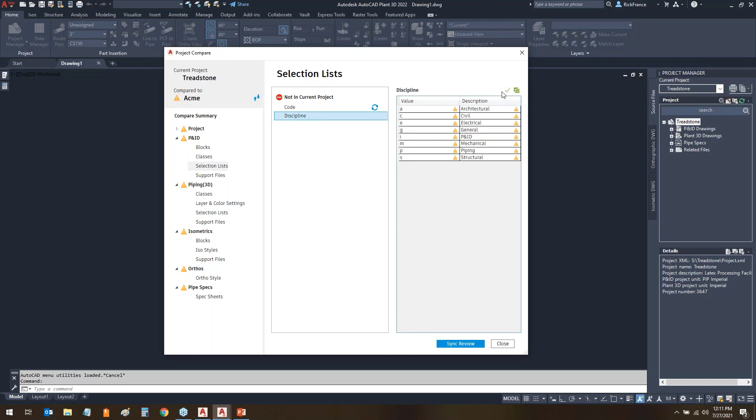The only thing I'd like to see even more so, here's the cone bottom tank and the manway. If you've taken my P&ID advanced class, you've probably seen those created. It's actually picking up anything, selection list, you name it, and saying we're ready to pull those over, including XML files. So I'm just going to go through here and start clicking it.

If I had one improvement I'd like to see them make here, under the piping you can see where the heat exchanger has some properties that have never been copied over. Just showing you a few things here and there.

I would like to see them add an accept all for everything without me having to go through here and actually review them, because right now that's the way it's set up - I have to go through and review each thing, each property, everything including the layer settings, and pull those over one at a time per item. I'd like to see them take it a little further and let me just say, I want to make these two projects the same, in one selection. Unfortunately, right now it's per file.

Now I'm going to stop here on these support files because these are actually XML files. What you can see over here is it's telling me compare is unavailable - I haven't selected one. If I select one of these, now compare is available because it allows me to compare the two files. The one thing is I have to have some type of software to compare two XML files. I've got mine here.

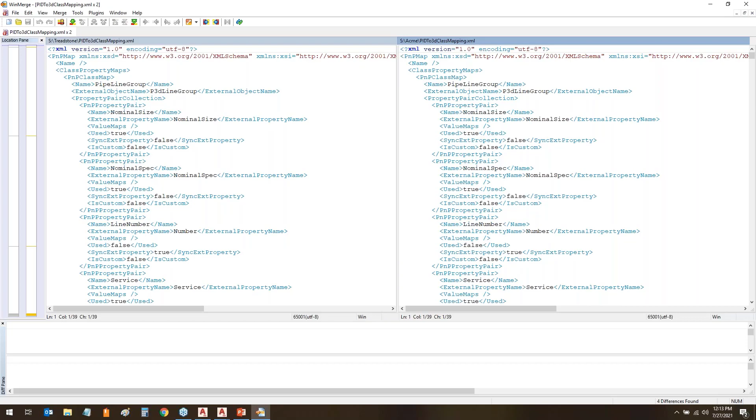But outside of Plant 3D, once you set up what you're going to use, you can see file 1 will be from Treadstone, file 2 will be from Acme, and it'll compare the files and let you see exactly what is different between those files if you want to.

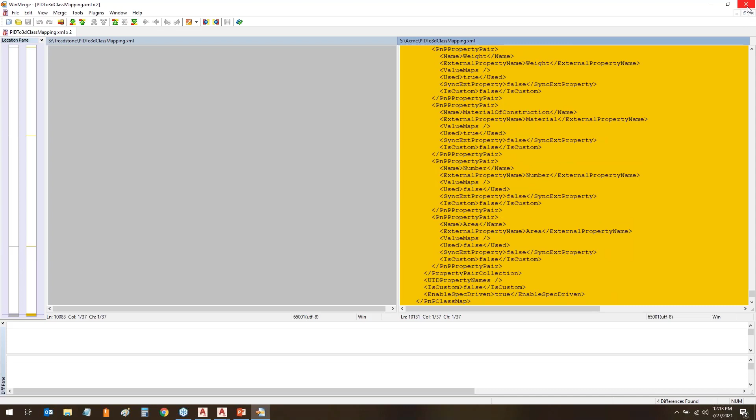So you can see Acme, which is on the right, has some different settings here under this property, and you can actually go through and review these if you need to see what exactly is different. Once you've done that, I'm going to go ahead and close WinMerge, and I can then accept those files if I want to copy them over.

Now we're going to come back to the XML files after I've finished going through these real quick. Notice here the isometrics, I can literally copy an entire isometric style.

So here my Vandelay B, which I created in a webinar several years ago, and for the isometrics, there it's found that, and I'm just going to tell it go ahead and copy it, and of course some XML files that go with it.

Once you've gone through these and accepted everything, here it picked up a spec where there's changes between the specs. So there's the CS150 spec, and Treadstone is the out-of-the-box spec, and the one here in Acme is the custom one that we've created in the advanced class.

So now notice the compare is unavailable on that, and it doesn't let me go to the settings on a spec because there's no software currently to compare those, but evidently they are thinking about adding that possibly in the future also. But I'm going to go ahead and accept it.

I've now accepted everything. It gives me a sync review where I can actually see the differences being accepted or compared over here. So I can hit sync review, and there's the project review where it's showing me everything that I've gone through and selected that is going to be copied from one to the other.

Because if you remember, prior to 2022, if you didn't copy the settings from one project to another when you created it, that was it. That was your one chance to do this.

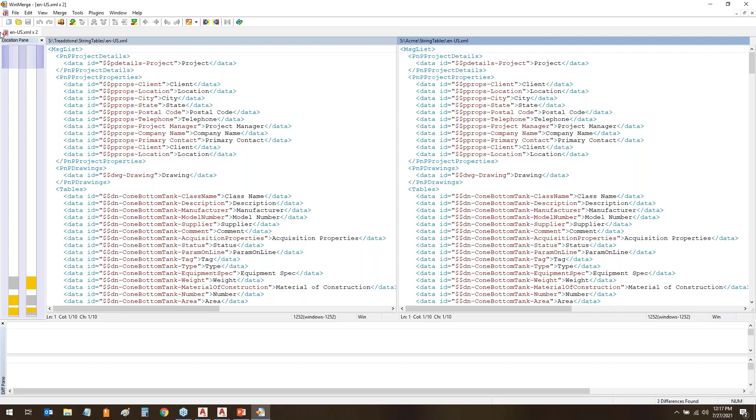I'm just going to kind of look at those two. Over here on the right-hand side in Acme, you can see where it's found some differences with the heat exchanger, for instance, tube temperature, and then on the left-hand side, you can see those are actually already in Treadstone.

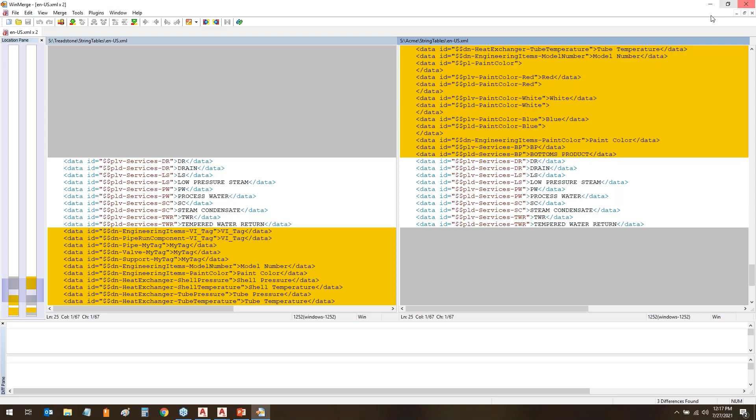That's because some of the settings I copied caused it to rewrite the XML files, so they're not identical. In reality, they are identical, they're just not in the same sequence. So that's what happened there. If you're looking for perfection, sometimes that may happen.

I mean, I could come in here now and say, let's copy that XML file, sync it, and sync now. If I did it now, those two files are identical at this point. So now they are going to be... I did project setup instead of project compare, I apologize for that. Let me hit cancel and go back to project compare.

This time when I do it, they are identical because the XML file was copied after it. So the only way to avoid finding something wrong with an XML file would be to do everything and then do the XML files, or just don't worry about it, which is what I'd suggest. They were identical files, just in a different sequence, so it saw them differently.

The other thing that doesn't get copied are paths and templates. So let me come over here - I've got 2021 open to Acme. I'll place it on the left-hand side, and we'll do Treadstone on the right. If I compare the project setup of the two projects... just take a second for it to open. Here's the project setup: 2021 for Acme on the left, 2022 for Treadstone on the right.

If you look at the paths, you'll see the support path and the templates are different. The template here is different, and some of the support - well, that one's the same. Of course the Treadstone is different, but like the equipment template here, that one didn't change. And here again, this template right here didn't get copied over. So it's not copying paths or templates.

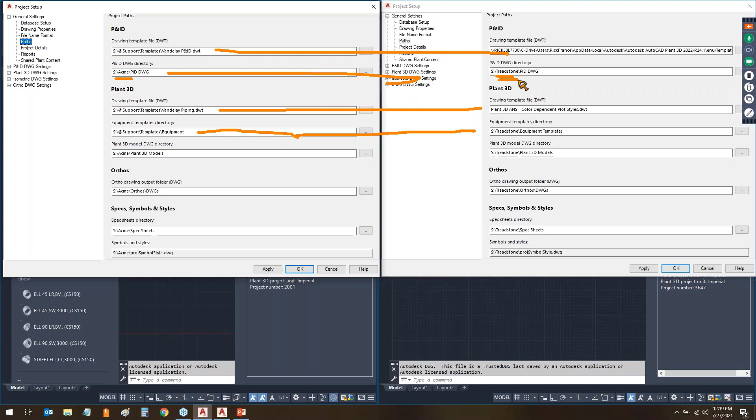They weren't even in the list. Kind of makes sense because they can be project dependent, and as you can see, all these paths are going to be project dependent. So it makes sense that it's not copying those over, but it's just something you need to be aware of - because, again, the Ortho template title block, if I come over here to the title block of the Ortho template, it did not set the template itself to match because that was not part of what it's going to sync.

So paths and templates do not get synced. As with all rules, there's always an exception. That's not true with the isometrics, because they're set by the actual project's isometric style. So if I compare the isometric templates, those did get copied over because they got copied with the isometric style itself. That was the exception to the rule, because it copied the entire style over, so those templates got changed. But Ortho templates, P&ID, and plant model templates do not get synced. So just be aware of that. Everything else is good to go.

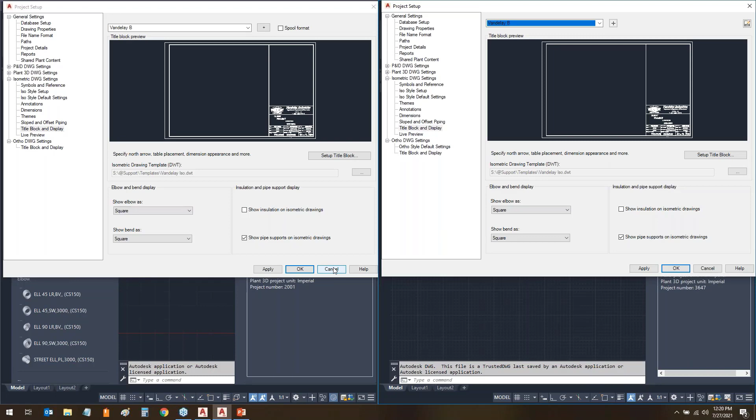I'm going to cancel my project setup here and maximize back up. Outside of that though, it is a very slick, nice way to not have to worry if you missed something in the beginning on one of two projects. Those of you using template projects can now create something in your template project, copy it to others, and sync it up with other projects after the fact - or vice versa. Create something new, like a P&ID symbol, in your current project and then sync that up with your template project so it gets that change. It's going to make life so much easier for so many of us, now that we can sync and copy these settings from one project to another after the fact. I'm very excited - if you can't tell I'm excited about this one, I apologize, because that one to me was a great add-on.

The next one is the offset location. Let me give you a little scenario of how it comes into play. You're now looking at another drawing on my screen, and in my project, 0,0 happens to be the intersection of column A1. That's where I've created 0,0. If you've used Plant 3D, you're familiar with the fact that all XREFs and everything have to line up on 0,0,0 - no exceptions. That has made it difficult for some people who want to put it into a real world environment, so they've had to come up with workarounds for that.

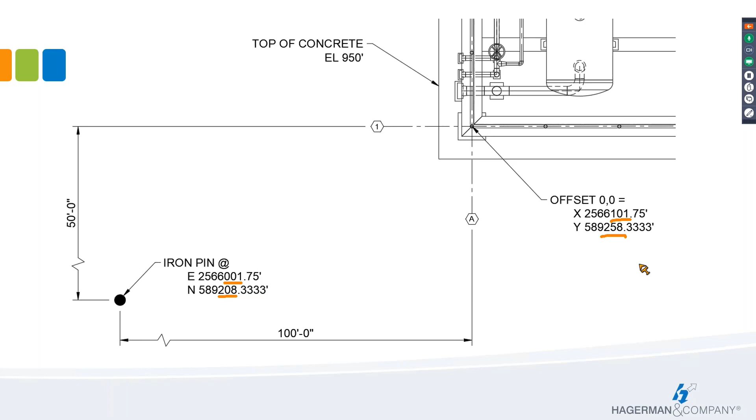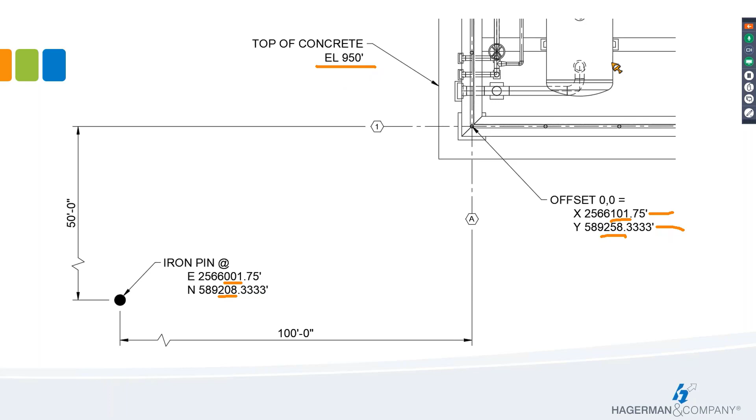So basically, if I take that and add 100 feet to my X dimension, and add 50 feet to my Y dimension, offset it that way, that's going to give me a relationship to that iron pin. So I need my offset location to be X and Y, that additional 100 feet and 50 feet in Y dimension. And I want the top of my concrete to be 950 feet above sea level. So those are the dimensions I'm going to use to get everything onto my project.

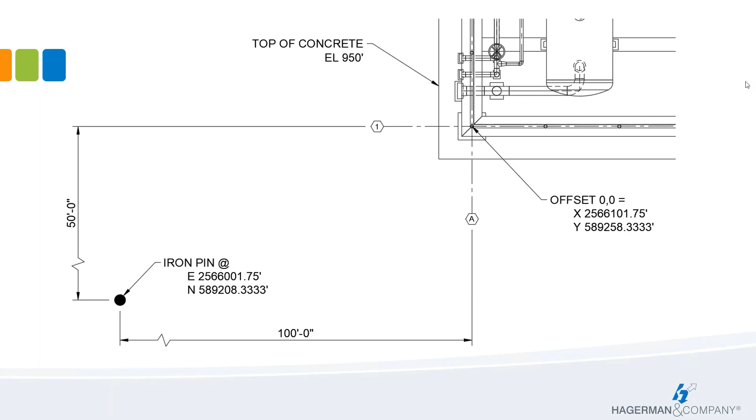So back in AutoCAD Plant 3D 2022, I'm going to go first to the project setup. One of the differences you'll notice on the orthographics page is, if you remember, before on the title block display page we also had settings for center, how you want your center lines and hidden lines. They have now been pulled into a separate page called Ortho Style Default Settings.

So here's that same information we used to see below the title block and display of the ortho settings before. It's now been pulled separately, and they have added this offset location. So for instance, if I wanted to put it in, remember I told you what my X and Y were, I'm just going to type it in here.

I could have picked something that wasn't as much typing, but I went ahead and did it anyway to be kind of realistic about where this plant was actually going to be, which in real life is going to be 950 feet above sea level. I'll go ahead and say apply, and you can see it's now got the offset location for the X, the Y, and the Z recorded into my default settings.

Now, let's say in real life it's rotated 9 degrees or something like that. You could also do that to get the exact rotation. I like mine to stay at the 0 plane, so I'm not going to do that in this particular one.

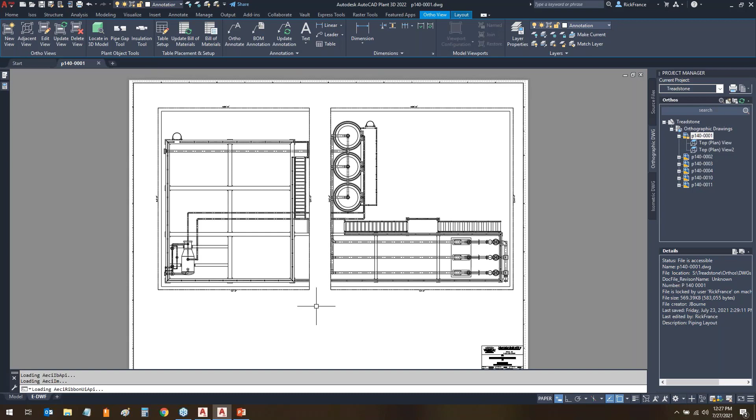So I'm going to come over to my orthographic drawings. I've already got one created here. Now I have split this one up with match lines into two drawings. Normally in real life, if I was doing something like that, I would have them on two separate drawings—that's the whole purpose of the match lines. If you watch the webinar on the OrthoCube and orthographic views, that's what we're talking about here.

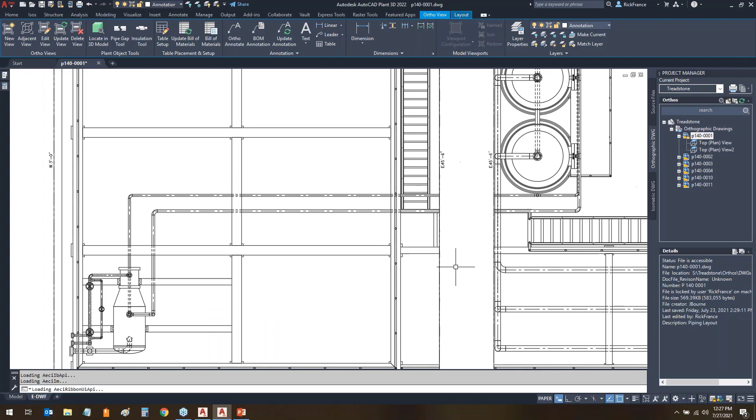Again, being that this was 0, 0, 0, the intersection there of A1, this one's south of that, west by 3 feet. You can see here where I took my match lines—if they were on two different drawings, they would be lined up by the 45-foot and 6-inch mark. So it gives me a way of showing that information. I put it on here to show you what it was beforehand, and now I'm going to delete those views and recreate them.

Three new views. This time when I open it up, because I have set an offset location in the project itself, you can see those dimensions are in here at this point, exactly as I put them into the project properties, and I could actually change them here if I wanted to.

So let's talk about this from a top view. Let's say this was going to be on the actual civil drawing, and it's going to be rotated 10 degrees. I can manually put in 10 degrees, and you can see it rotated my entire plant those 10 degrees, or whatever else. Let's say it was going to be negative 9.5. Whatever I put in there, it's going to rotate accordingly, so I can do something a little more realistic on that civil drawing.

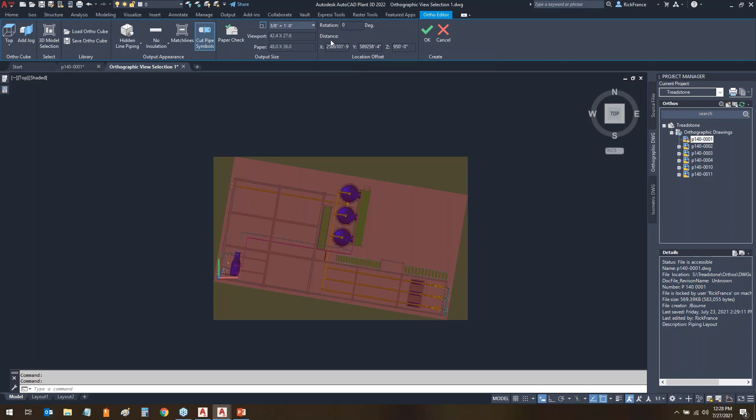In my case, I'm going to leave it at 0 because that's the way I prefer to work in my actual construction documents that I'm creating here, but it is going to be basing some dimensions and things like that on the actual location where it is in reality.

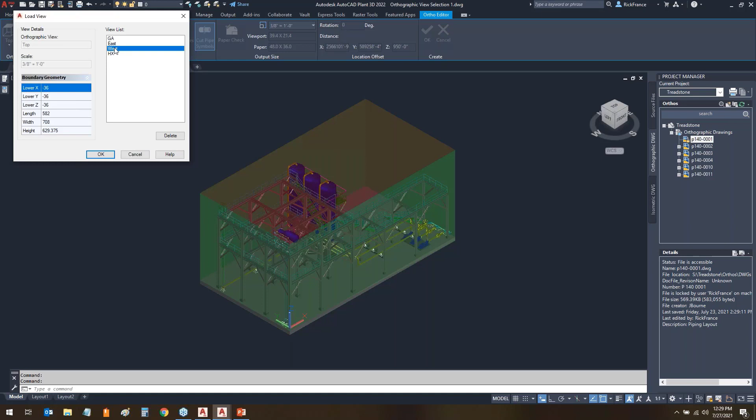Now I'm going to load the ortho cube for my west side, which is basically just like in that other video, that other webinar, the Ortho Cube and Orthographic Views, same thing I did there. But this time when I add it, let's make sure the match lines are turned on. We'll add it in here, and I'll place that one over here.

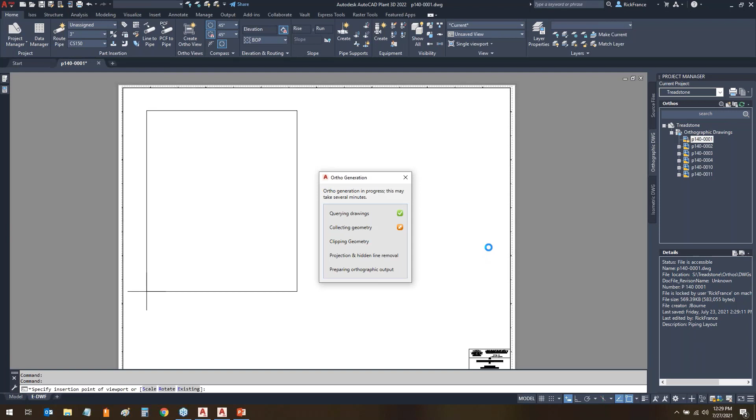I'm going to turn around. You'll be able to see, without me zooming in, that those views have a different dimension than just 3 feet in there, but we'll look at those after we place the other one in here.

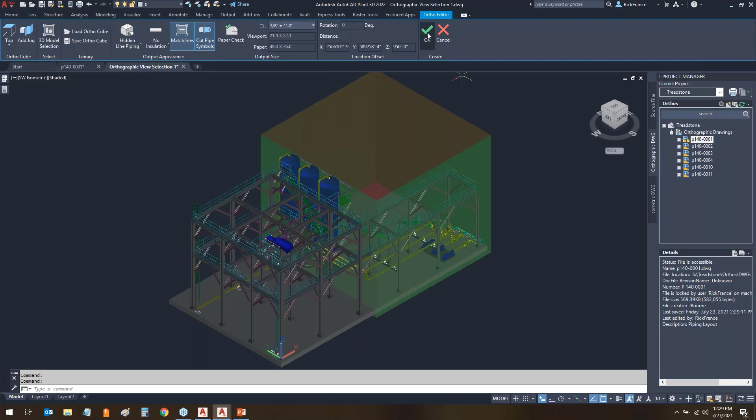We're going to go ahead and grab the east view. So I'll load that ortho cube in here that was predefined in the other video. We'll hit OK, and I'm just going to place it right here beside it. And that way we can see the results of that offset location.

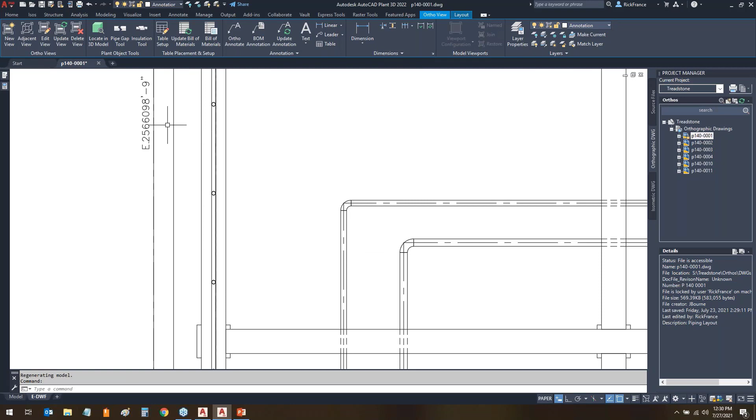So if I zoom in here, you can see the east is set 3 feet below that offset location. This one's now 3 feet in that direction. And of course, these are also using my east and north.

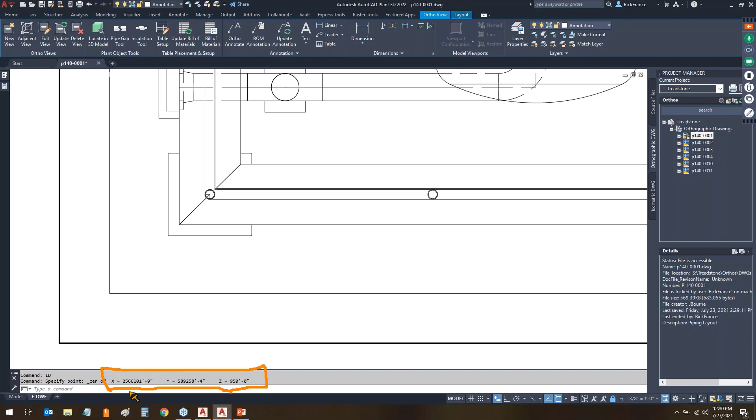It is physically placing my ortho view at, if I did an ID of the center of that railing, because that would be on my X-axis 1, you can see it's actually placing this ortho at that XYZ that was predefined in the project. So that's how it's actually working, is it's using the dimension I gave it to place my orthographic drawings, and that's how it's using those dimensions.

So that's just to show you basically how it affected the plan view. Let's go take a look at an elevation real quick.

Same thing in here. You can see originally the elevation at top of concrete is at 0. Here's my elevation at 25 feet for level 1. Level 2 is at 40 feet. Even bottom of pipe here is at elevation 10 feet. So just showing you what it was originally.

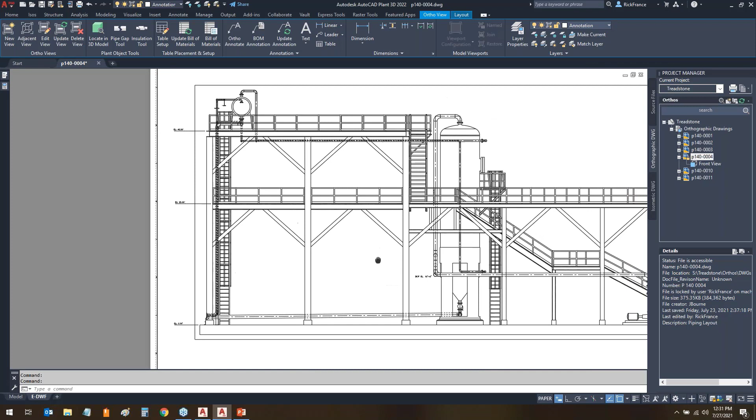I'm going to go ahead and delete the view. Since these are actual dimensions, I'll have to delete those separately, and we'll create a new front view based on the offset locations that we've set in our project. So again, I'm going to load in that general arrangement top view, but change it to a front view, and we'll just place it.

I'm going to turn off the match lines. We'll just place it right here on my elevation drawing. Same exact view as far as what it looks like. It's identical to the one that was here before.

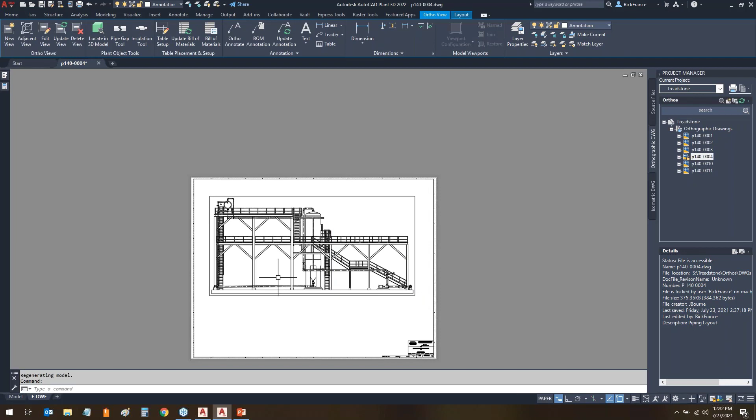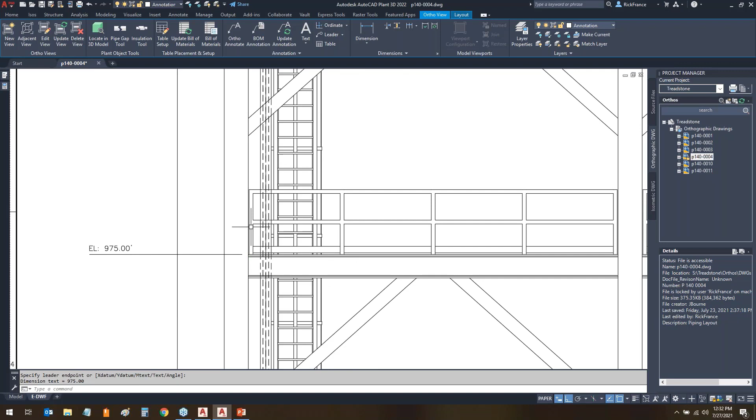The only difference is if I came over here and added my ordinate dimensioning, which I have set up for the top of concrete, elevation 950 feet, because it's giving me the sea level now. Come over here on this one, it's going to be 25 feet above that, so 975 feet. This one will be an ordinate dimension of 990 feet.

So I'm actually getting those sea level dimensions when I look at this plant now, just like I would in any plant I would design in real life.

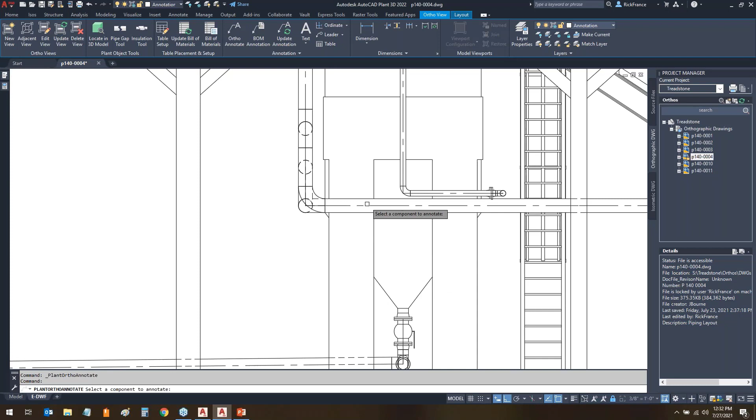And it's not just with the ordinate dimensions. If I came over here and took the bottom of pipe with the ortho annotate of this particular piece of pipe here and took a look at the BOP, you can see it's placing it in there. Bottom of pipe elevation 960 feet. So again, it's giving me that, where it is above sea level.

If I don't want to show sea level, then I just need to change the view to a 0Z axis, and it would give me everything just like before.

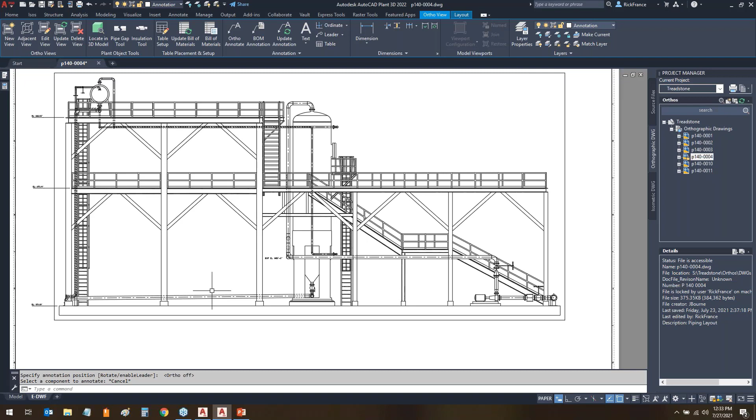So it's all on how you work in your company, but you're able to get these offsets now to where you can get the dimensions exactly like you need them, if you work with something like that, with the sea level or any other type of Z axis you may want to define, or X and Y. It's all relative to what you set up in the project.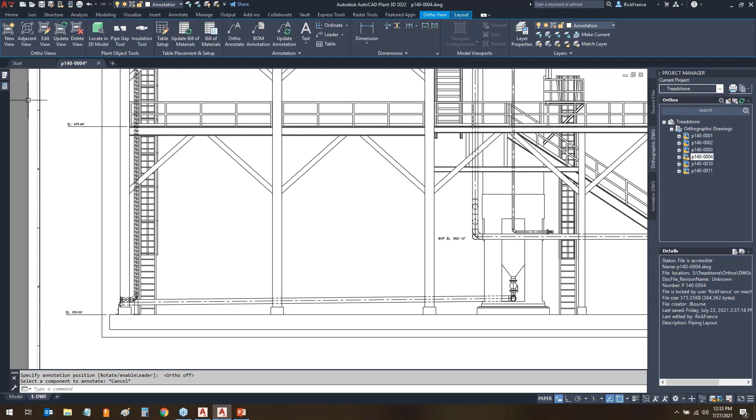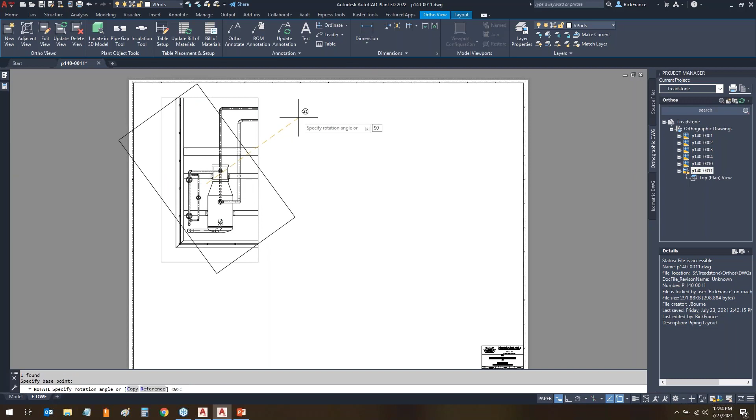Now let's take a look at the rotation. I'll go ahead and use this drawing here. If you watched that webinar on the ortho cube and orthographic views, one of the things we addressed was that if you want to show this at a rotated view, most of the time they will tell you to rotate the viewports in here, and work with it that way.

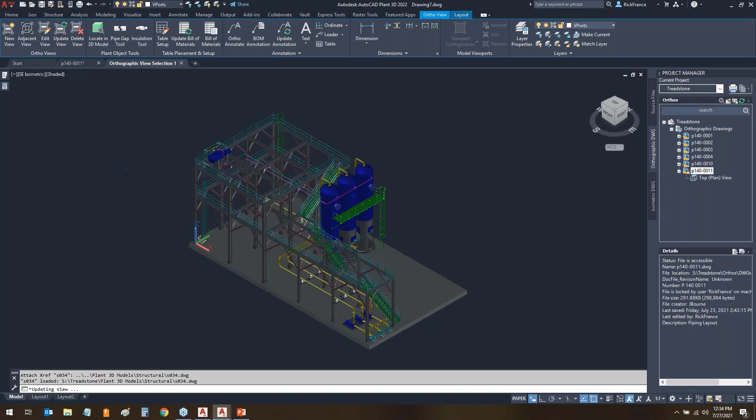The problem is this is not the front view, so if you do an adjacent view of the front, it's going to give you this view. I won't go through that again, it was all addressed there. But the main thing is if you ever edit the view, it's going to put it right back as it was originally. So it just flips it back around. It's no longer rotated, so it's not the best way to do it.

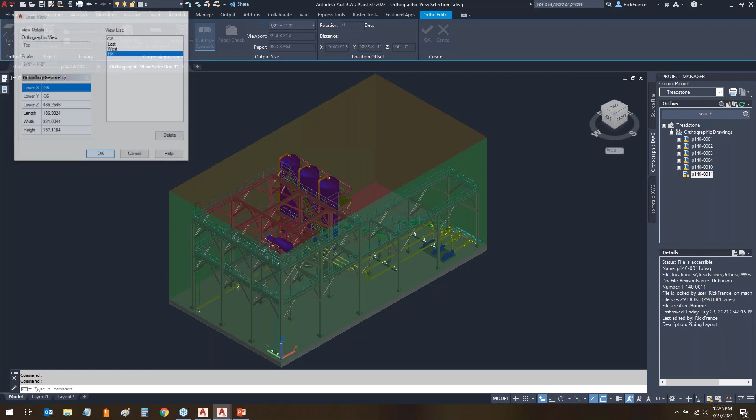In that particular webinar, I showed you the best thing to do, the way the software was designed in previous releases, was to rotate the actual ortho cube in this view. So you would come in here, I'll load the ortho cube in for that particular one, and then rotate the ortho cube, and that would solve the issue.

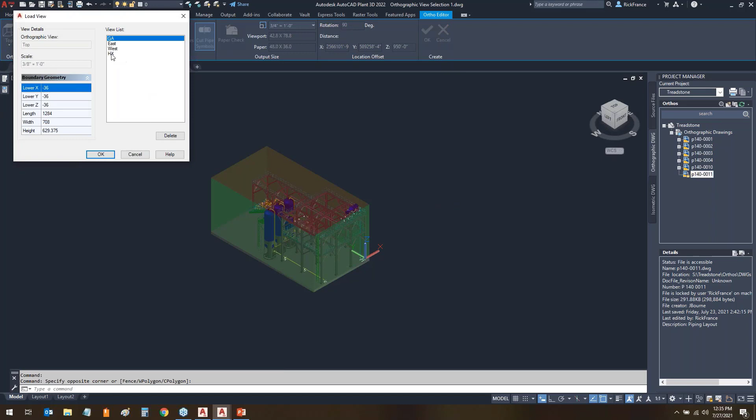That's not necessary anymore. It's actually easier than before because now I can literally just put in a rotation up here. And you can see it rotated the entire cube project. If I went and loaded that exact same ortho cube I had before, it's going to be out of place now because of the rotation.

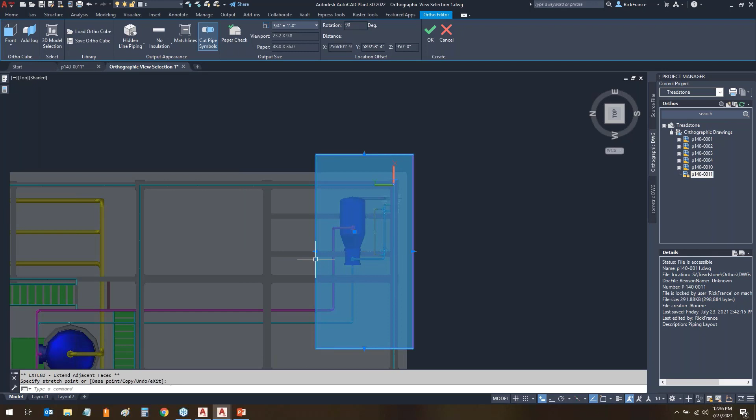But if you notice here, when I look at the front, that front view is the one I wanted. So I can just come in here at this point. I'm going to resize this thing, let me turn off some osnaps so it won't snap to anything, and just resize it. That looks pretty good right there. That's basically what I had, maybe a little larger, but basically the same shape as before.

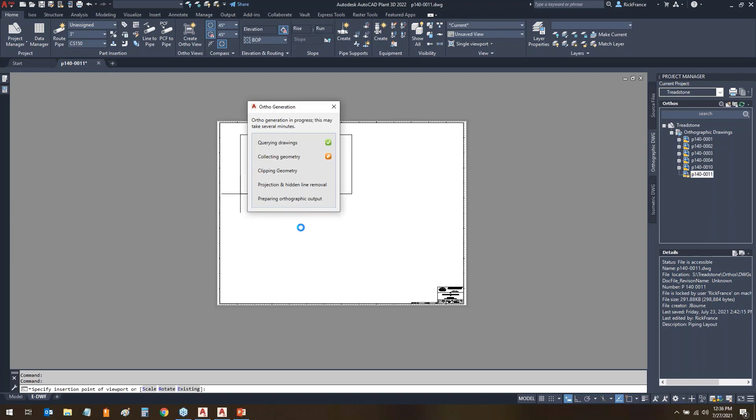I'm going to go back to a top view, and go back here. So now I'm looking at the top view, but it did the rotation for me. Instead of having to go through and rotate that ortho cube like before in previous releases, here I can just give it a rotation right there. Everything rotates. And if I was at 10 degrees of the whole plant, I would just rotate the whole plant another 90 degrees.

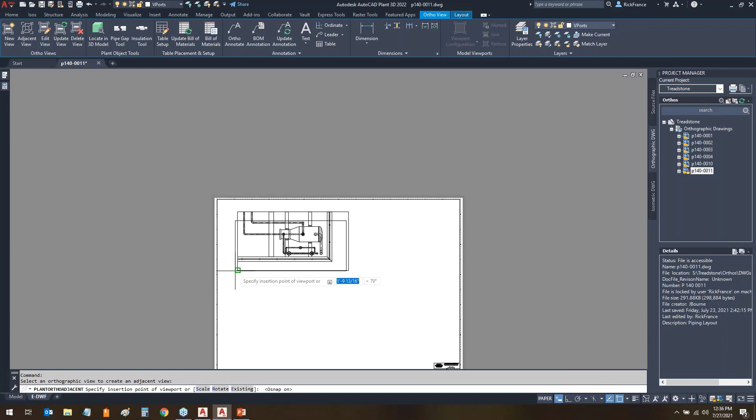So it'd be 100 degrees and get the same effect. But now, just like before, if I did an adjacent view, it sees the front view correctly based on that rotation, so I can line things up and get the same thing. Just like in that previous release where I showed you the workaround, now I can simply go in there and say rotate it 90 degrees and I'm done. I don't have to do anything else, and it will remember it in this drawing from that point forward. So they've made it a simpler method, even better than the way I showed you before.

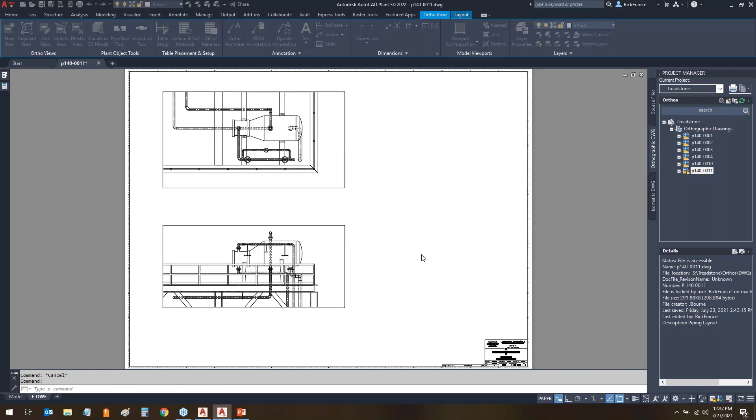So that functionality is now built into it. That's what I can do with the offset location and the rotation now. I can do it on an individual drawing, or on the entire project, however I need to accomplish what I need to do on my drawings at this time. So I'm going to go ahead and save this drawing, and we're ready to talk about the next thing that they've changed, because that's pretty much it for this particular one.

What I'm going to do is go ahead and take 2021 back up here, and let's go ahead and put this over here on the right. So now we're going to talk about the isometric changes.

Because annotation and dimensions are controlled by the themes, they've reorganized to where now themes is above. If you looked at isostyle setup, there's been some minor changes here. For instance, you don't see spool format here right now because they've put it under drawing type, so you choose either a spool fabrication or our isometric type of setting right there.

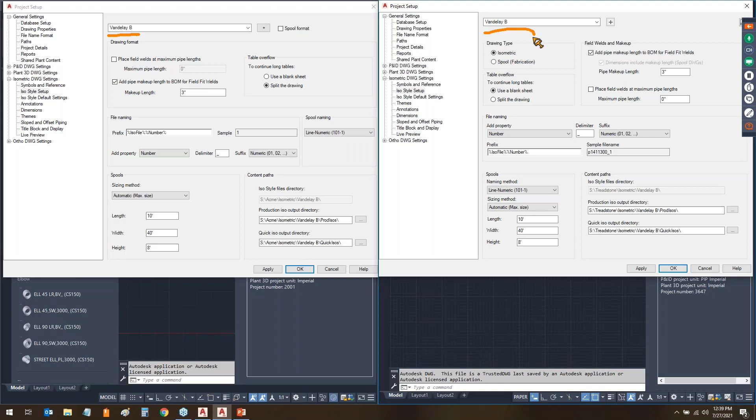So they've made some small changes like that, very minor. But the main thing, and I'm also looking at Vandelay B in both - this again is my custom one that we're looking at. So it's been laid out a little bit different, but very, very minor. Everything's still there as far as that's concerned.

I need to bump this out of my way where I can see. Right here, there's a new button that was not there before, and this is your ISO style editor. If I click on that, I'm going to go ahead and say save the changes. So this is in 2022. I now have an ISO style editor where I've got an editor for the ISO config XML.

About a year ago, I did a webinar called To Isometrics and Beyond, where we concentrated on things you can do only in the ISO config XML file. That's what we're looking at here. So if I was to redo that webinar today, this would be the method I would be using to modify that file. As a matter of fact, if you click on file name format here, these are the changes - some of the changes we made in that webinar are showing up here at this point.

You have two ways you can look at files here in the ISO style editor. You can look at it by table, which I love - that was a nice add-on. Or you can look at it as code. Now, if you look at it as code, and you watched that other webinar, this is what you saw in the other webinar, only I was using Foxe. Here, I'm just using the editor they provided.

You can see notes are in green, the answers or any kind of variable is in red, and what it's set to is in blue. So you kind of got some color coding, but we saw that also in Foxe, so that's not much different.

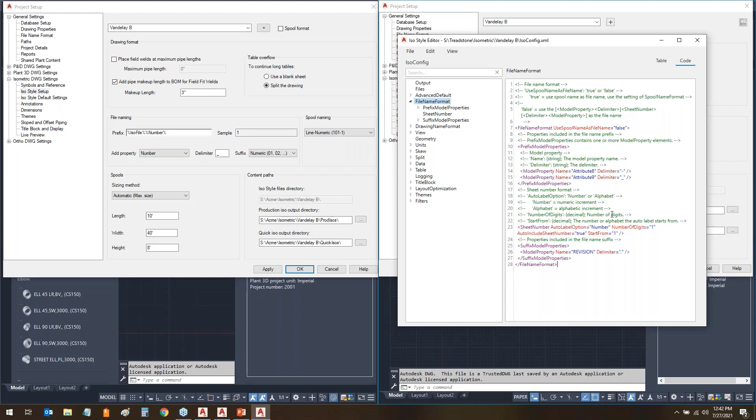So it's literally, instead of having to go in here and find it and set it true, false, or whatever else, I can literally just, in a lot of these, click on, turn them on or off, and that controls how it's being set here in the sheet in the code. So it's a little bit more user friendly is the point here. So that's the ISO style editor. Now we're going to come back to this in a minute and show you how this can work with other settings that we're doing.

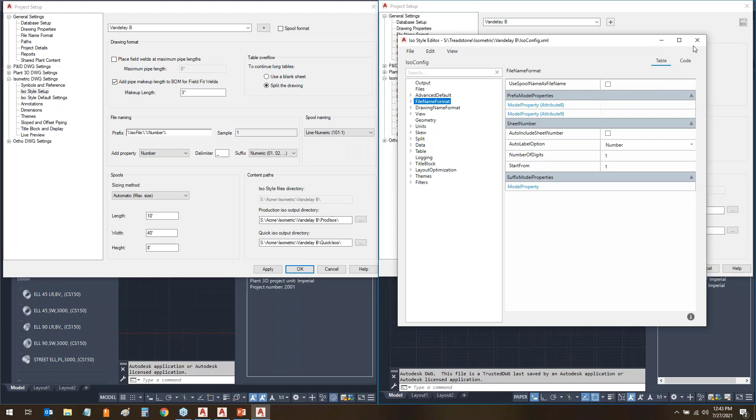First I just want to give you an overview of how it's actually working as far as the editor itself. I'm going to close this by hitting the X. I'm not going to save any changes because I didn't make any changes I want to keep—I was just showing you how things can be clicked. So that's the ISO style editor, and it will stay right up there for the ISO config for this particular style on every one of the different dialog boxes.

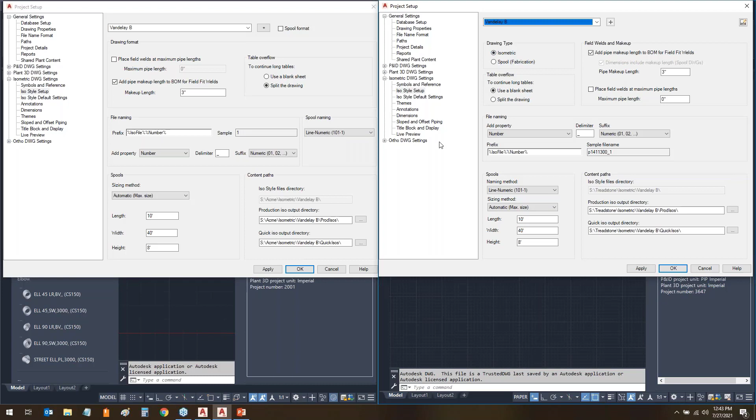Now I could click through the dialog boxes. None of them have changed but themes and dimensions, other than some minor stuff like what I showed you with the spool thing. We're going to start with themes because everything about dimensioning is what they kind of fine-tuned here, and you can see there's a major difference between how you view the themes from 2021.

Here on 2021, you've got some different settings, same settings here, symbols—there it is—enable annotations and dimensions. Bill of materials is grayed out because that's handled in the overrides in the branch piping, but here you can see it's the same thing as before. They just said it was display, and it's still grayed out. So these are actually the exact same settings between the two projects, so you can kind of see how everything is working there.

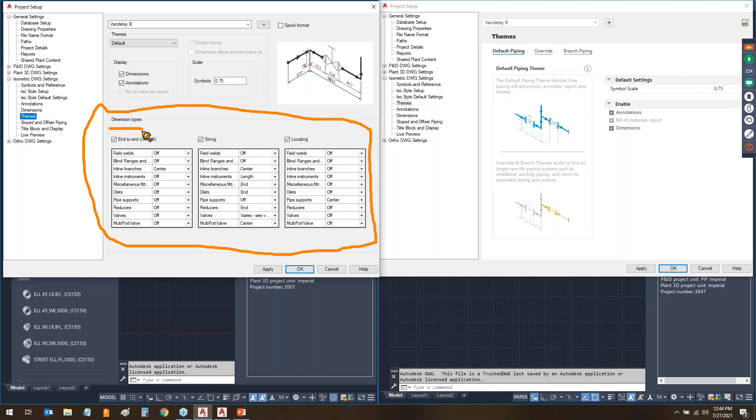Now in addition, we have these dimension types of the themes, but they've reorganized them. So I don't see them here because this was really not so much to do with themes as it had to do with dimensions, so they've moved them to where dimensions go. We'll get back to that in a little bit.

But here you can see different settings. I'm going to have to move this again out of my way because it's blocking things I can't see. Some different settings here that are pretty much the same, but as you start going through overrides, now we're seeing continuation connection, existing piping, fitting to fitting, small bore. That was here in the past—if you go over here to the themes on 2021, there's continuation, fitting to fitting, existing piping, small bore. So they still have those same settings, but now they're just under this override section.

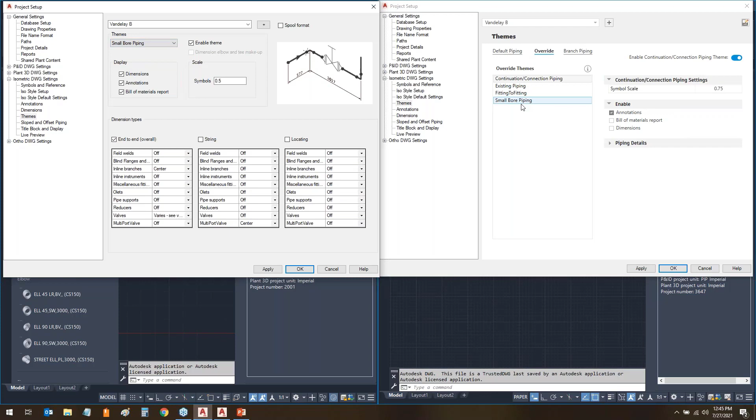If we hit small bore piping in 2021, let's take a look at that. Come over here, small bore piping—you can see again the same symbol scale, what's being checked and enabled, but you'll notice here they've added small bore includes sizes up to 2 inches. Well, you were able to do that in the past also, but it was on the dimensions tab, not the themes tab.

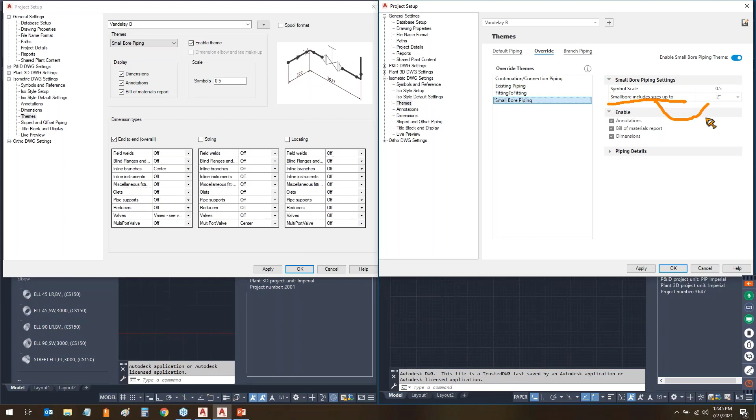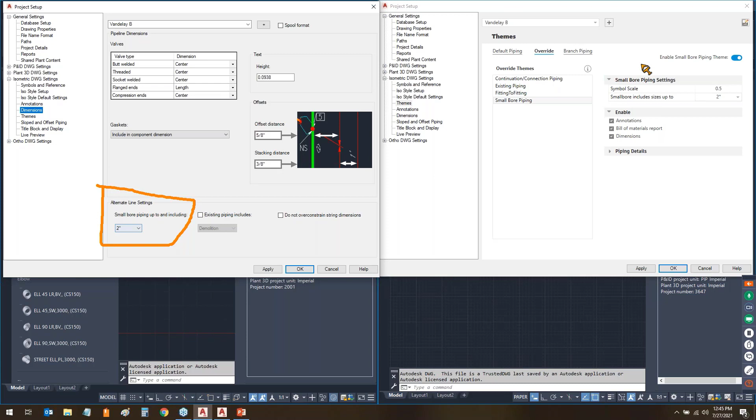So if you came over here to dimensions in 2021, here's the alternate line settings for small bore piping. Again, they've reorganized this to where the items are together where they're supposed to be, and you don't have to hunt them down as much. That's the nice thing they've done—organized it to be more logical and user friendly. So the same information may have been able to be set in the past, now it's just all together.

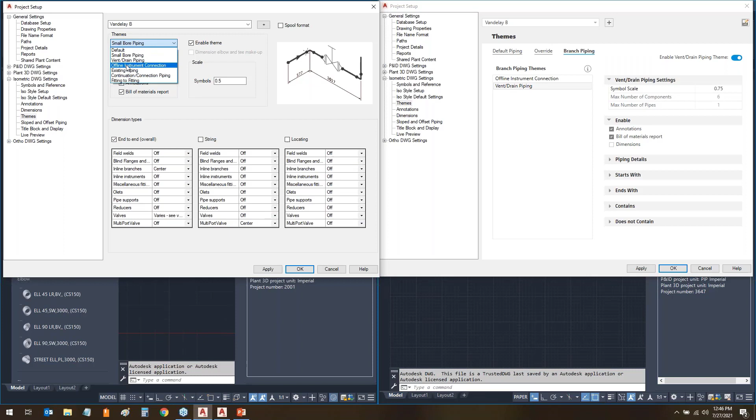Small bore piping—here over here, themes, small bore piping. So everything is together and organized to where you can change things where they should be and where you're looking for them. If I go over here to branch piping, offline connection, vent piping—again, they're right here. There's the offline and there's the vent drain. Let's take a look at the vent drain.

Here you can see I've not only got the same information here, but I've got some additional stuff down here. I've also got maximum number of components and maximum number of pipes—now they're grayed out. Same thing if I start looking at the ends with and the contains and things like that. But this is all the settings that are related to vent drain piping in the XML file. So I'm seeing all the information that used to—all I could see was what I could change. Now I can see all the information.

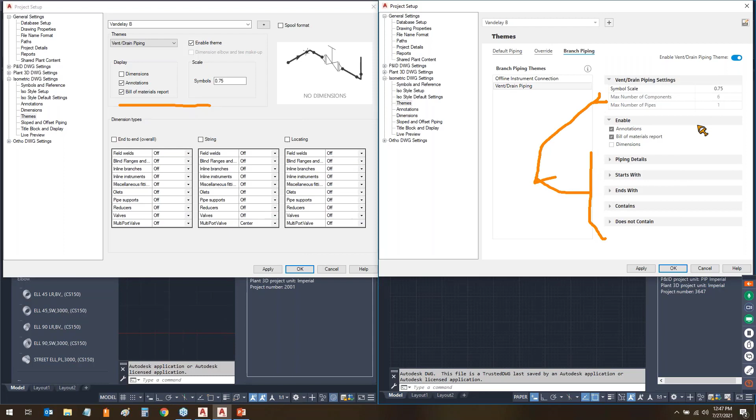I can't change it here, but I can see it. But because I have the ISO style editor, I can change it here. Now here, one other thing—notice the theme has been enabled. Right there's where I enable the theme; it's either on or off.

Just by the simple click, just like before. But here, let's say I wanted to change the maximum number of components and pipes. I can simply go to the ISO editor and open it up.

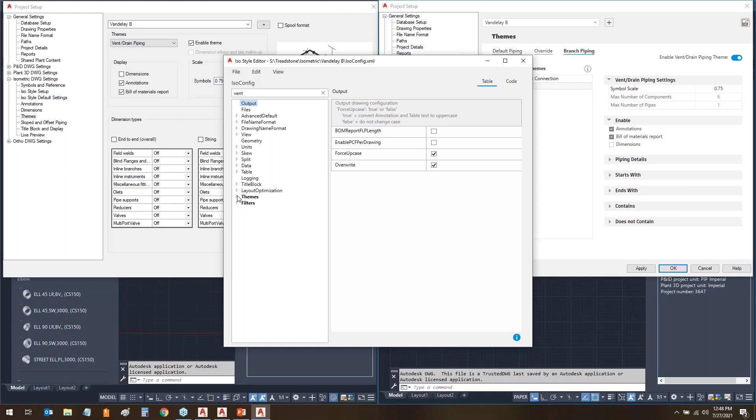I could search, go down to themes and locate it, or in this case, I'm looking for vent drain, so I'll just search the word vent. Notice it highlighted themes and filters because that's where it found the word vent in the entire ISO config file. So now if I open up themes, there's a branch piping theme for vent.

Come here, click on that. Notice here, there's the maximum component count and maximum pipe count. So now, if I go through here, I can see everything in this area of my ISO config file. I'm just going to change two things.

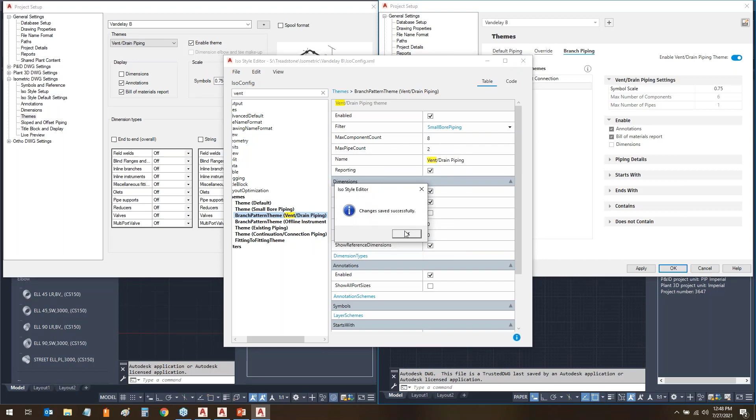I'll change this to 8. I'll change my maximum pipe to 2. Go ahead and hit save. Now here, you can see those changes.

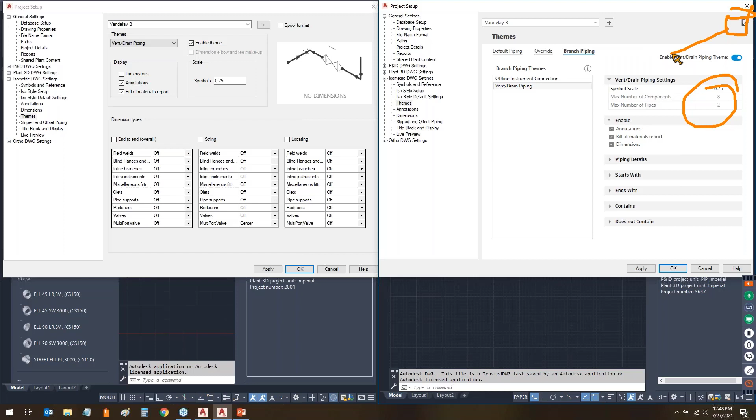So it's easy for me to look and find all these settings, all this information that's been there all along. I can now get to it while I'm in my project setup a lot easier, find it, locate it, and make the change. It's so much easier than it was in the past.

If you remember that other webinar, I took you through each section one by one and the changes you could make, and it was pretty complex. It's not anymore. You can find stuff so easily in that ISO config XML file and make those changes. So while they haven't pulled everything into the project setup completely yet, they gave you a method to get to it and make those changes much easier than you could in the past.

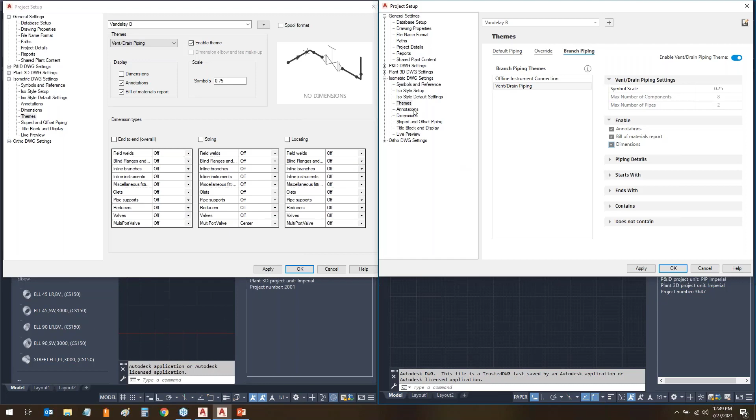Let's go ahead and take a look at the Dimensions tab and the changes there.

Again, you still have things such as text height and your offset distances, they're still here. But now the end-to-end, the string locating, all that being activated, is right here instead of being just on the themes tab like it was in the past.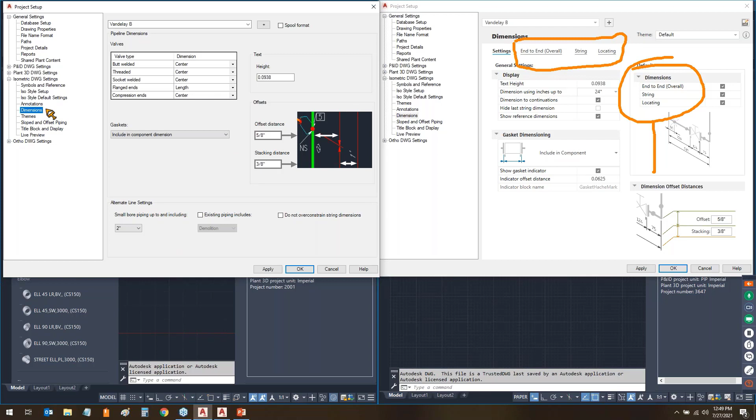So if I come to themes, I'm going to go ahead and put it back on default, which matches this one. You can see the end-to-end is activated on the default. If I go to end-to-end here, I'm on default here. I could change it to one of the others. Since I was on default here, I'm just looking at it. They all work the same.

And you can see now the inline branch is set to center. Well, that's what it was set to here. So the settings are still here, just like before. I just got some little dialogues now so I can see kind of what they're pointing out in the different places.

What I couldn't do before from this project setup is add additional anchors. These were my anchors, that was my choices. The only way to add additional ones was to go into the ISO config, find the section, and do it all manually. Now I could just hit add a new dimension anchor.

So I'm going to add one for the T's. At the T point, I'm going to add an anchor. I want the end type to only work when it's butt welded, because all my T's are butt welded in my project, so I'm only going to have it working for butt. If I use a flange T, it'll ignore those and use the flange version. But here for the butt welded T's, I've added an anchor.

I could also come in here and add additional conditions, such as saying if it's a certain size, spec, or pressure class. I could say if the material is carbon steel, I've added it so it's only going to work with carbon steel butt welds, or stainless steel, something like that. I add that dimension anchor, and it's been added in there.

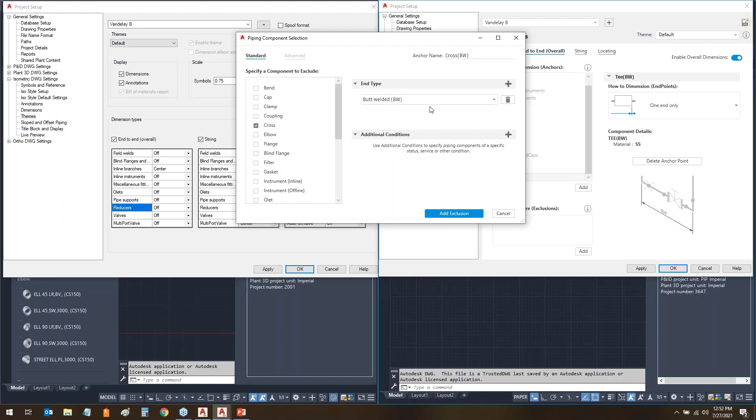There's a cross, and it is a butt welded cross. Don't exclude anchors there - or maybe it probably would have been better to be a flanged anchor cross. If it's a flange cross, exclude those. Don't include them, even though I have flanged elsewhere.

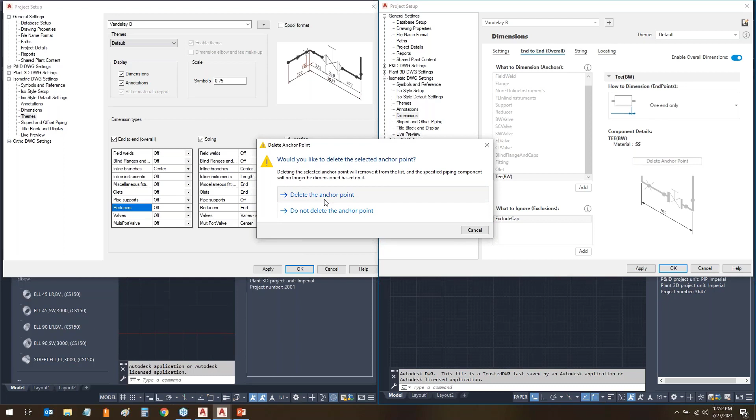And of course, if you don't want something, you can delete the exclusions and you can delete the anchors also. So you can add your own, delete them, get as specific as you want right here in my dialog box of the project setup. So it gives me a way to go through here, and you can look and see any other changes they've made to these.

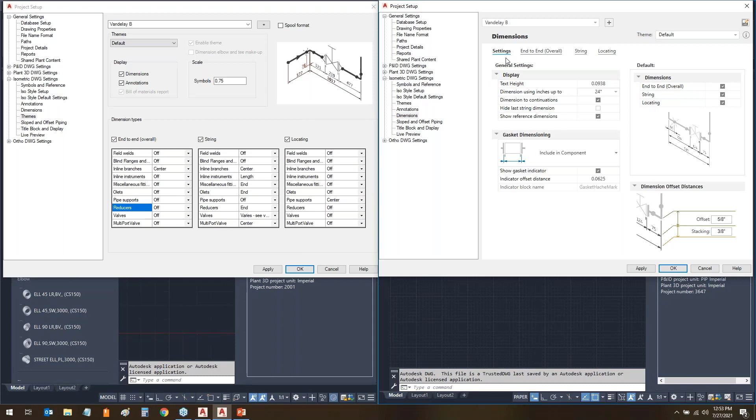But most everything, other than new functionality that's been added to the project setup, is one step further in getting everything into the project setup for your isometrics - that's what they've added. So that kind of concludes what we can actually show you physically in here. Let me go ahead and hit cancel. In addition, there are a couple of other things added to 2022 that you just can't see or can't really show you.

Collaboration project support for the new Autodesk Construction Cloud - so BIM 360 has been changed to Autodesk Construction Cloud. Projects are supported here with all the changes they made. You actually got to see it a little bit when I was doing the project compare, that I could open a project from the construction cloud and copy information from one project in the cloud to the project on my computer.

So you had that ability in the project compare, but it's fully supported now with the changes made. AutoCAD Plant 3D now has object enablers for Navisworks, so it supports a lot more properties that it didn't support in the past, and all the nozzle detail information, which was not supported in previous versions of Plant 3D and Navisworks, is now all supported through the object enablers. So they've added new functionality for information that can be passed to Navisworks.